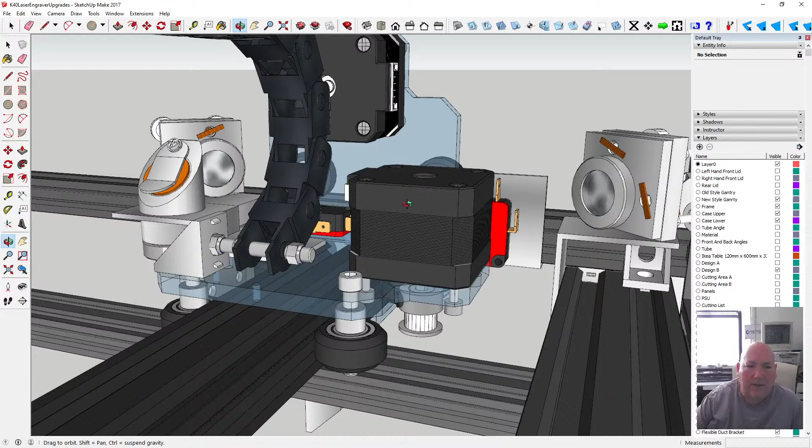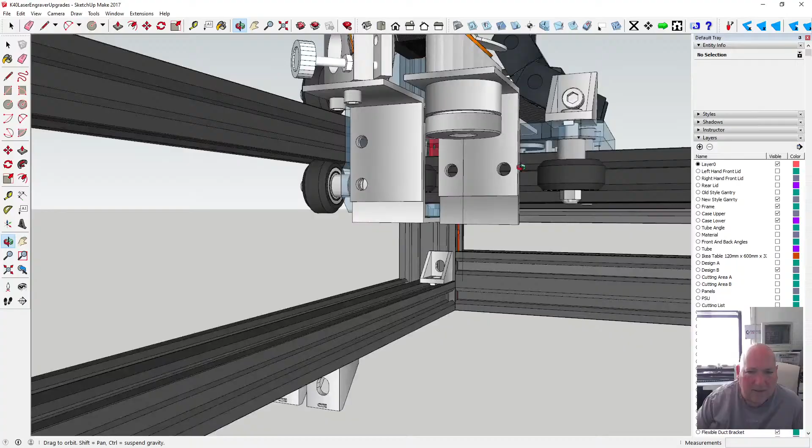Okay. Yeah, so this mirror is all pitted and hardly any reflection. This one's better. This one's not so good. Not so good, pitted as well, and the lens, can't tell, looks okay. Anyway, so there's all that.

So I need to... Oh, my elbow's hurting. Why is that?

Anyway, so what do we do first? Tell you what, let's model a bracket. That's easy, that'll get us into the flow again. I've got to model these door brackets I found. So I suppose we could model them. Yeah, let's model them, it's got to be done.

What does the thumbnail say? Let me just check the thumbnail. Have I even got the thumbnail on? Yeah, the weakest link, the mirrors. Yeah, we know the mirrors are the weakest link.

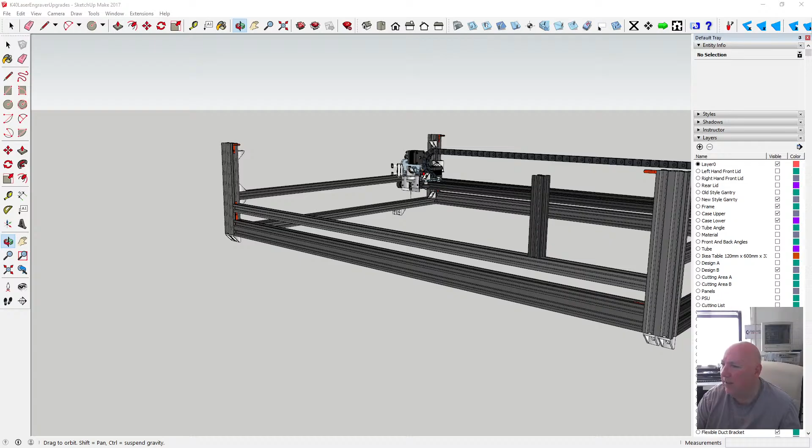I tell you what, before we do that, let's do some research. I'll just bring up ChatGPT, friendly neighbourhood ChatGPT. Right, here we go.

Laser, Chinese, K40. Have I spelt Chinese wrong? What's the matter with Chinese? Okay, K40, and we want to say to it: mirror 1, 2 and 3 - do they have any special properties? See what it's got to say about that.

Of course it's gonna... yes, mirrors 1, 2, 3 in a Chinese K40, CO2 laser machine have specific properties and requirements. Here's a breakdown of each and their special characteristics. Right, here we go, we're learning something now.

Overview of the K40 laser mirrors. The K40 laser uses 3 mirrors to guide the CO2 laser beam from the laser tube to the laser head, which contains the focusing lens. These mirrors are typically: mirror 1 mounted at the laser tube's output, mirror 2 positioned on the opposite side of the gantry, mirror 3 inside the laser head directing the beam down to the lens.

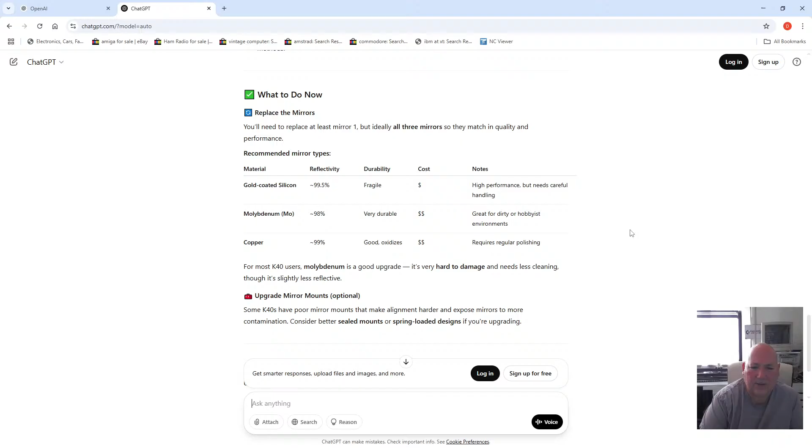For most K40 users, molybdenum is a good upgrade. It's very hard to damage and needs less cleaning, though it's slightly less reflective. Upgrading mirror mounts is optional - some K40s have poor mirror mounts that make alignment harder and expose mirrors to more contamination. Consider better sealed mounts or spring-loaded designs if you're upgrading. Until you replace them, you'll have to reduce the laser power.

You'll have reduced laser power, and alignment might be harder due to uneven reflection. You risk burning more material into the damaged mirrors, making future cleaning worse. Would you like help finding a good mirror set online or help with alignment?

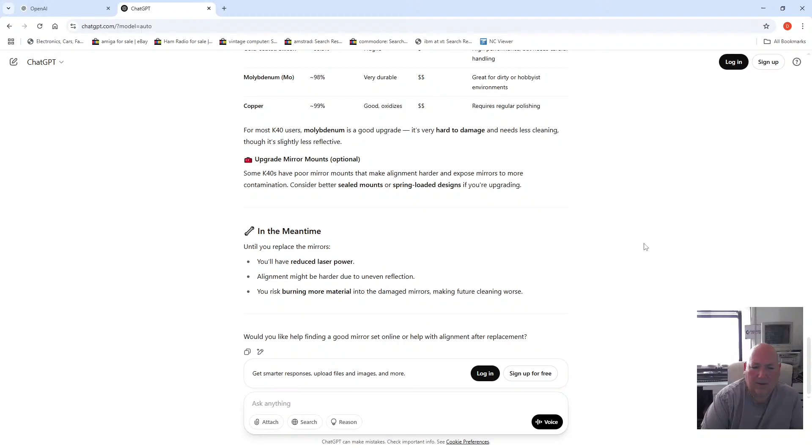Oh dear. Just got some lemon, it's a bit strong - I didn't dilute it.

I'm sorry to hear about the damage. Based on your script, it seems that the gold coating on the mirrors has been compromised, leading to reduced reflecting performance. To restore optimal function, replacing the damaged mirrors is essential.

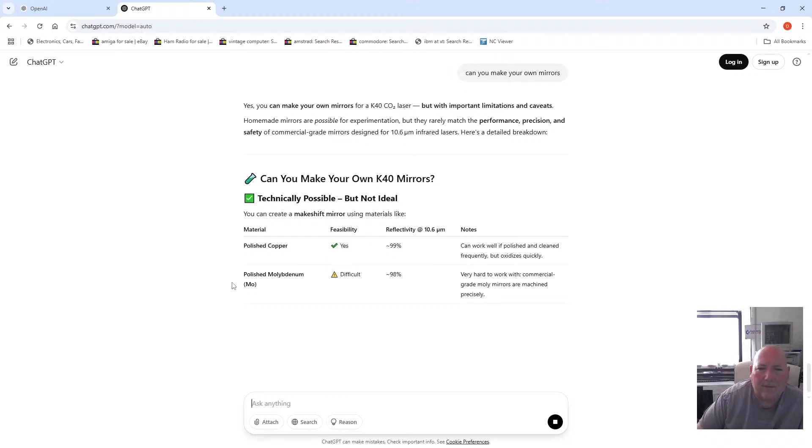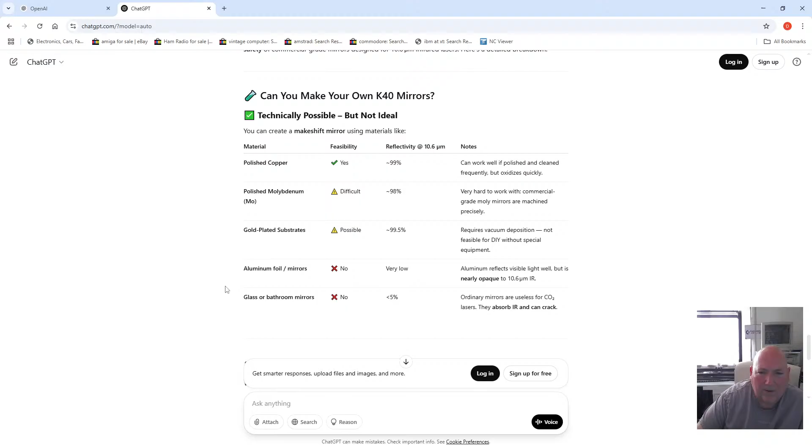Yes, you can make your own mirrors, but with important caveats. Homemade mirrors are possible for experimentation, but they rarely match the performance, precision and safety of commercial grade mirrors designed for 10.6 micrometer infrared lasers. Technically possible, but not ideal - you can create a makeshift mirror using materials like polished copper or polished molybdenum, which is difficult, or gold polished, gold plated substrates, which is possible. Polished copper can work well if polished and cleaned frequently, but it oxidizes quickly. A DIY polished copper mirror is the best way to go.

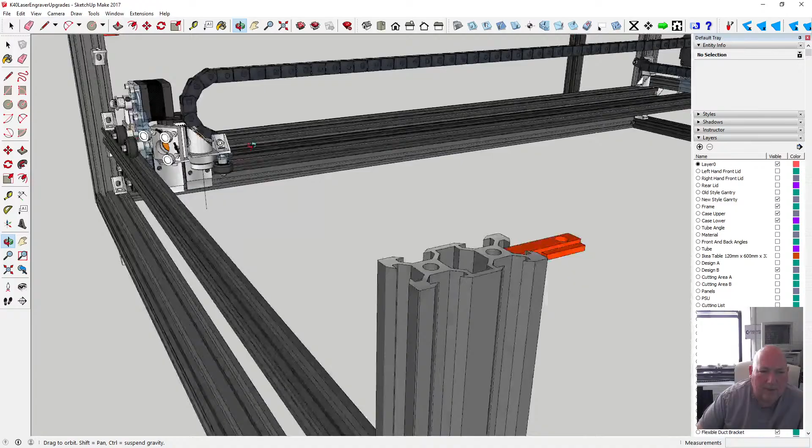Okay, alright. So we need to find some new mirrors by the looks of it. I've got a brand new set, but I don't really want to mess with the mirrors on a good working setup.

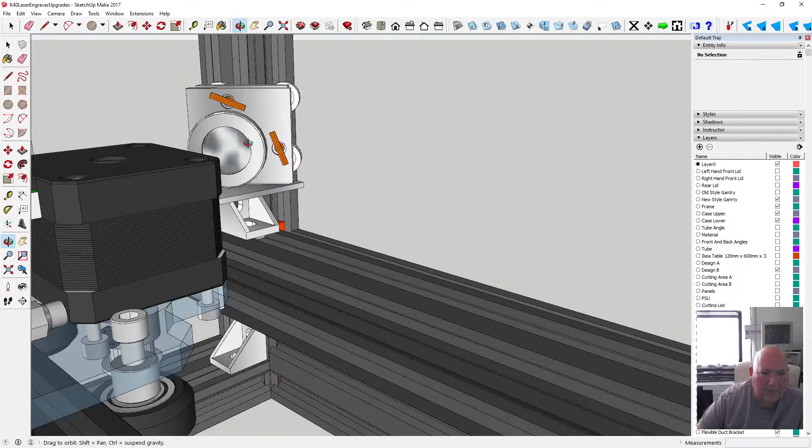I don't know whether the damage on mine was done before and all I did was wipe off the residue, or did I wipe the surface away? I've got to think that I wiped the surface away, but before I touched them, they were all matte and blemished, and this colour - in fact, that colour isn't the colour anymore. It shouldn't be that colour anymore, although it might be. Let's just change that.

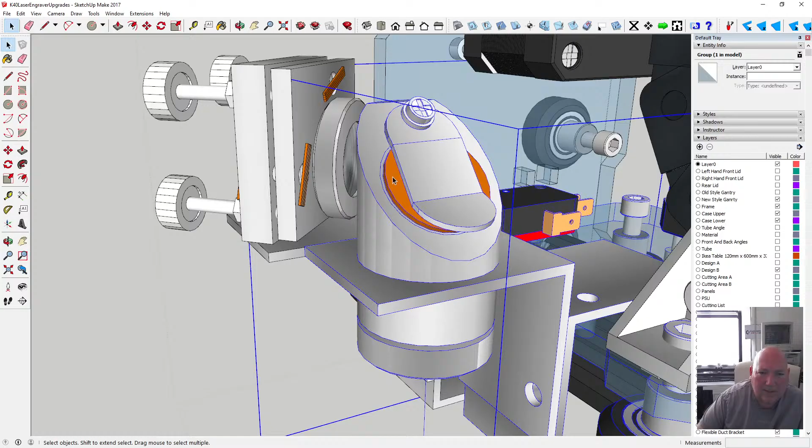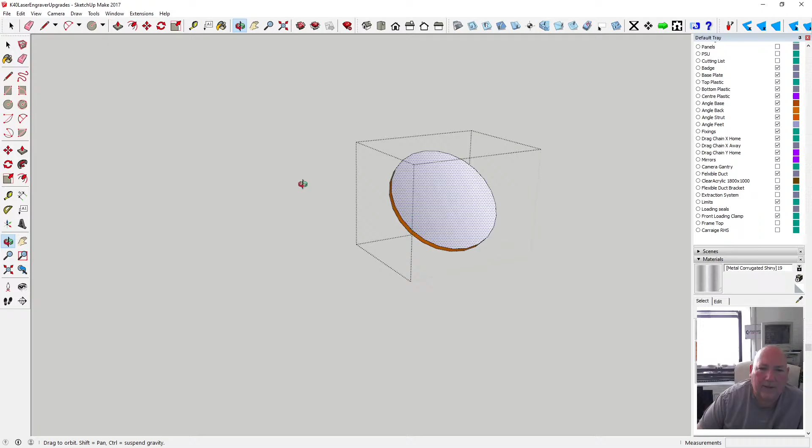Alright, let's change the colour. So that's going to be some kind of metallic. No, it's not that colour. Okay, so it's metal. Is that it? Probably. And then we've got the other side of it.

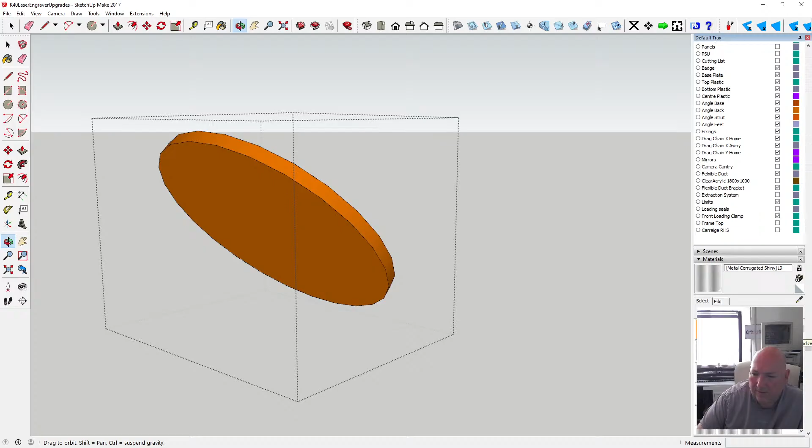Can't grab it. Now I can. Right, so we've got that side, and it needs to be a clear mirror, in the model. Is that okay? Probably.

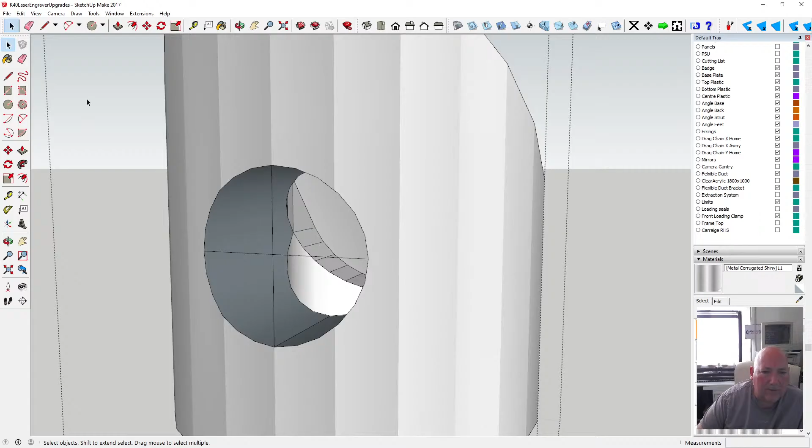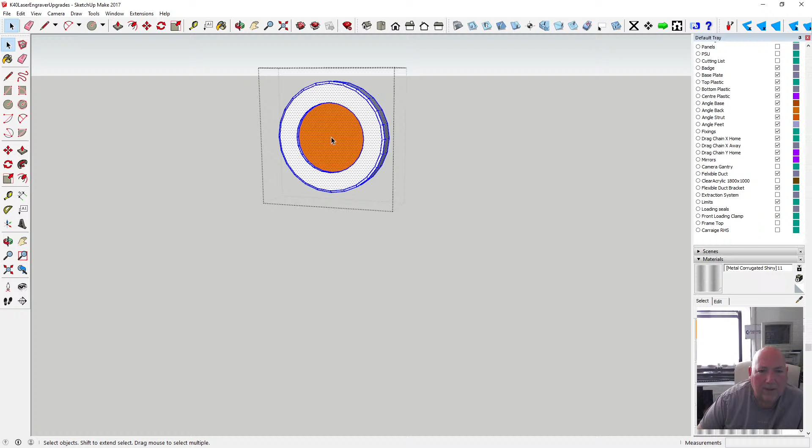We need to paint that one as well. Yeah, that's it. It's supposed to be a different colour maybe. Right, so why is that colour? Yeah, it's not supposed to be that colour. No, it's supposed to be silver. Okay, so it is.

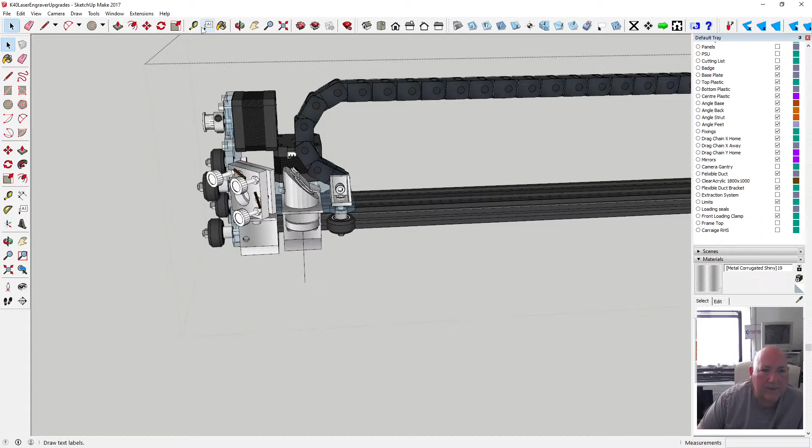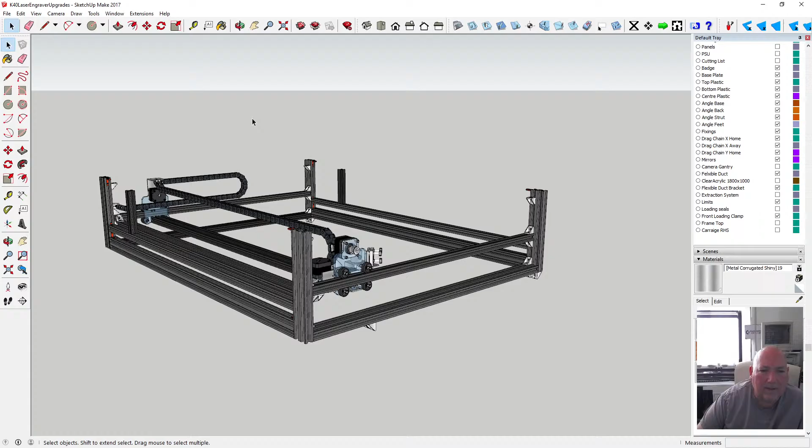Oh la la. Another one here, look at that. Okay. Alright. Okay, anyway, I've lost track of where I got to.

So yesterday I milled out, cut these, milled them out, and attached the switch, attached the mirrors.

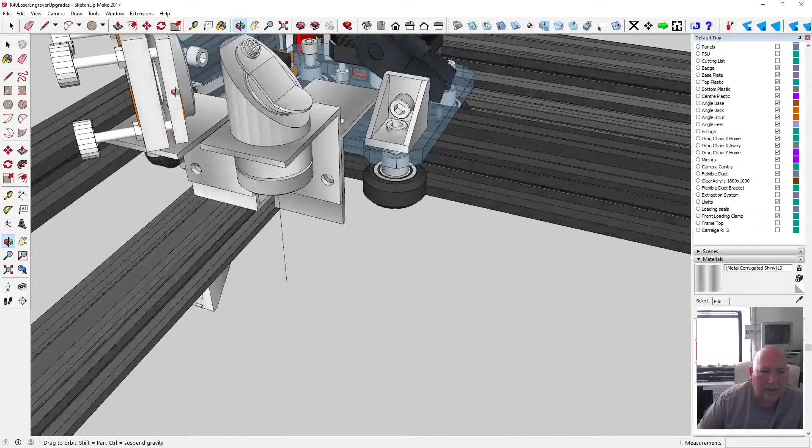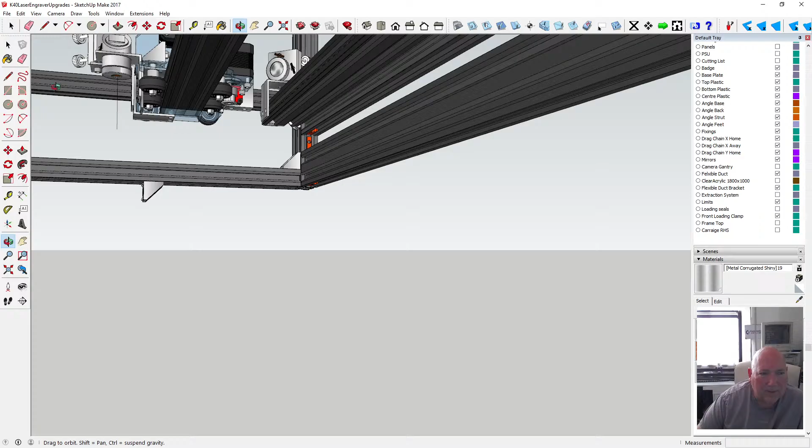Now this mirror is a bit, let's say, not flimsy, but it does move. And it's fastened underneath here. It's a little bit far. See how it's fastened to this right on the end, so it gives it a bit of this way. Not a lot. I don't know what will happen if it trundles along.

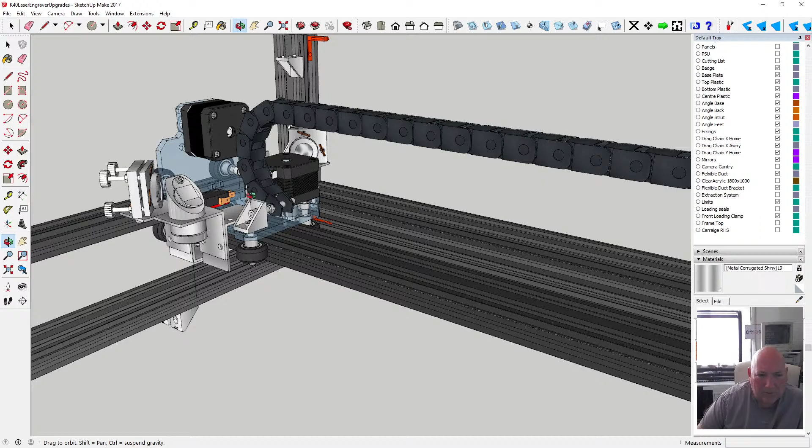And also the drag chain, when the links move, it sort of vibrates down. So each time a link changes position, there's like a joop, joop, joop, joop. So together with this oscillation and the chuk chuk chuk might be enough to make the mirror move.

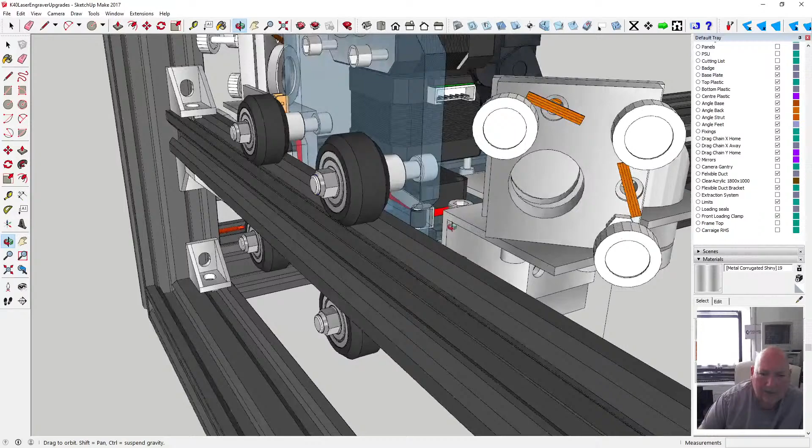Now we can probably do something about it, like fasten this bracket to this stud to give it some stability. I'm inside the model.

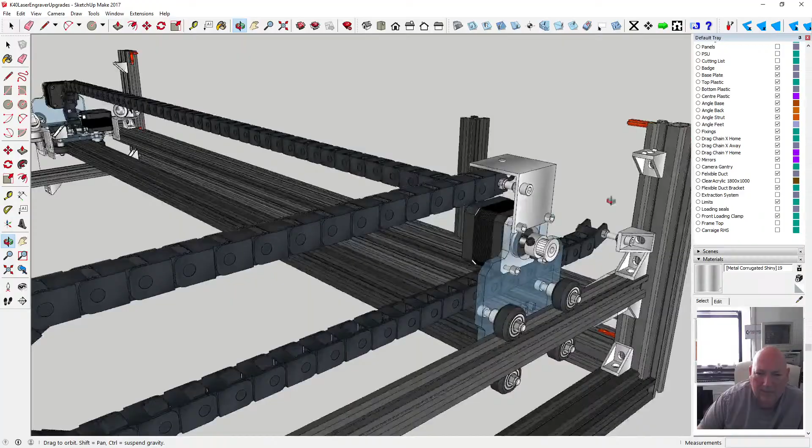Anyway, so right, so what I've got to do later on, yeah, I'm still trying to work out this. Is that right? Yeah, so that's what I've done there. And I've got to make this fit there. So I've got to go and carve that out.

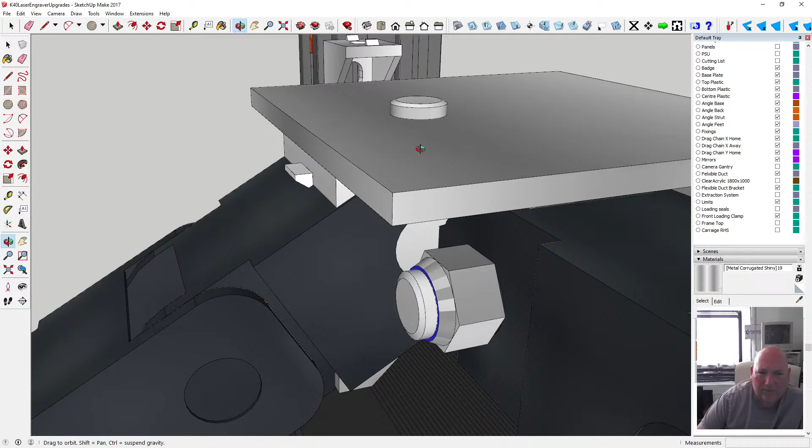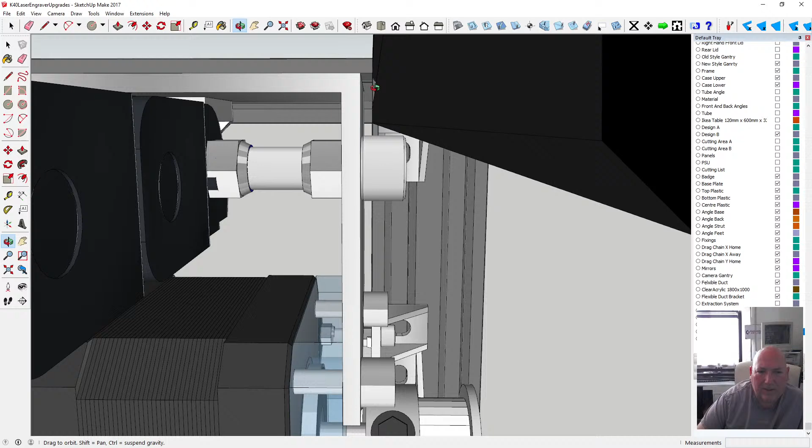And then I've milled this out to 5mm. And it needs a nut on it, or to be a 6mm fixing, because this is so close to the top frame top. As you can see, it's so close that the nut, I've had to use a different, no, I haven't been able to put that in.

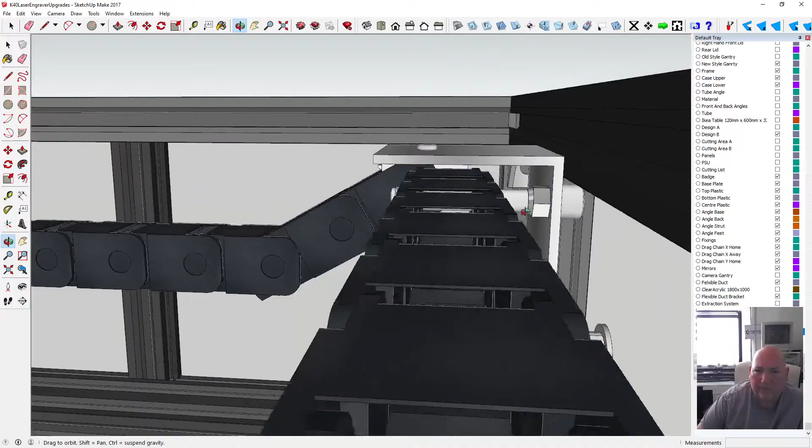Because in reality that is too close. So that's too close to that. So I don't know why it isn't, and I've lost control of it. Yeah, I don't know why it's, so that's just too close there. That fixing, even though it looks, when I put it in, it's sticking up because it's touching there.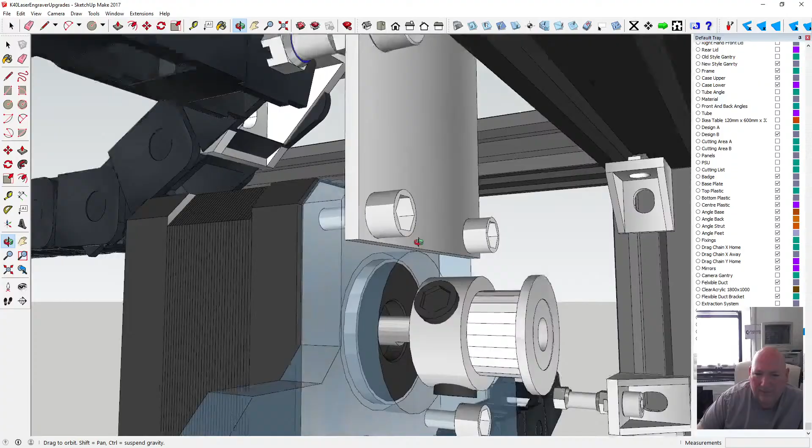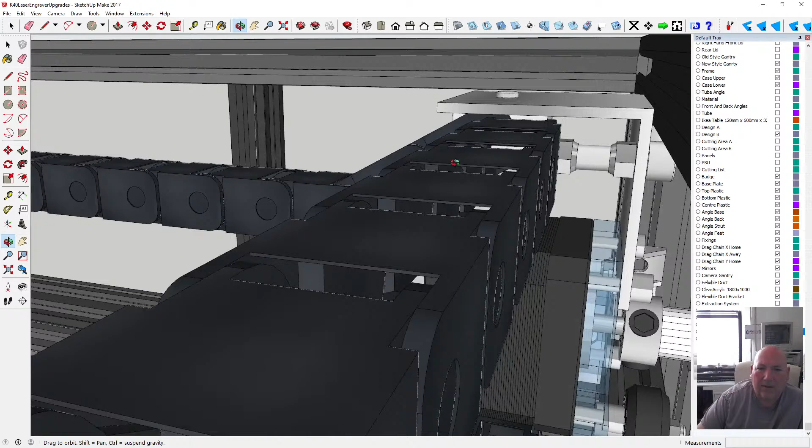So I've got a bit of space underneath, so it needs to be, probably needs to be smaller, this one. And I've put it in and it's flush with that, so it might need another set of holes here and then lower in a bit just to get that, or mill a new hole out, or elongate that hole and move it down. Don't like the idea of that, but I'm low of angle now. I've got no angle left, not that size. Anyway, so I've got to work out how to do it.

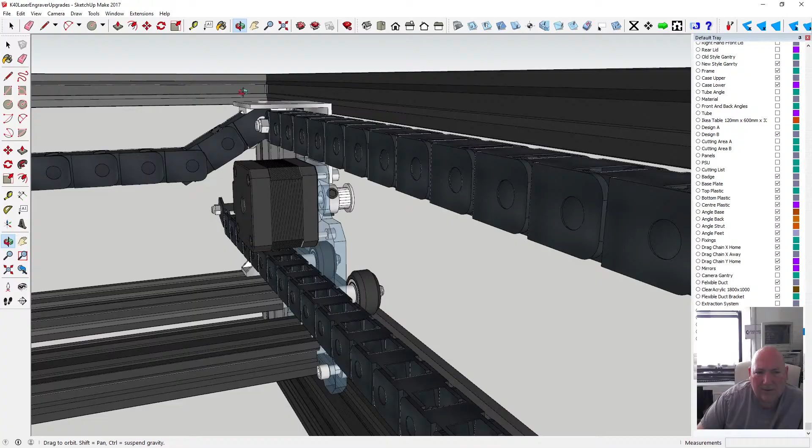So I should have put really, there's no room for a nut, if you know what I mean. There is no room for a nut, because the plastic will sit there and slide across the door, so it can't go any higher than that. Even that's too high there, it needs to be flush.

But I could make another one and lower it. So basically I could use the same bracket, take it off, and maybe lower it.

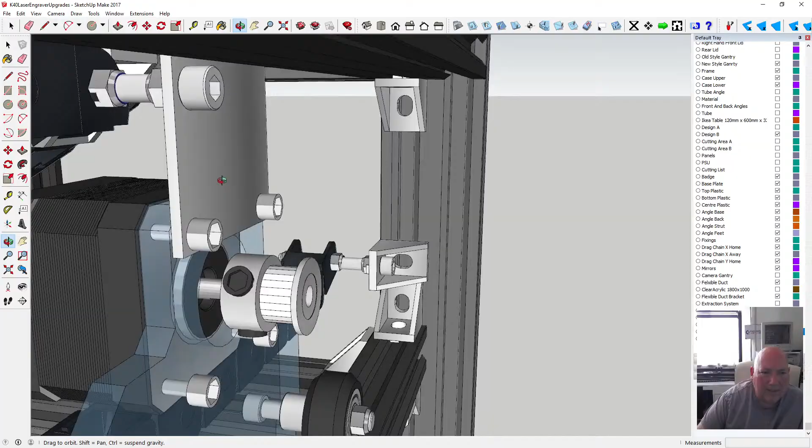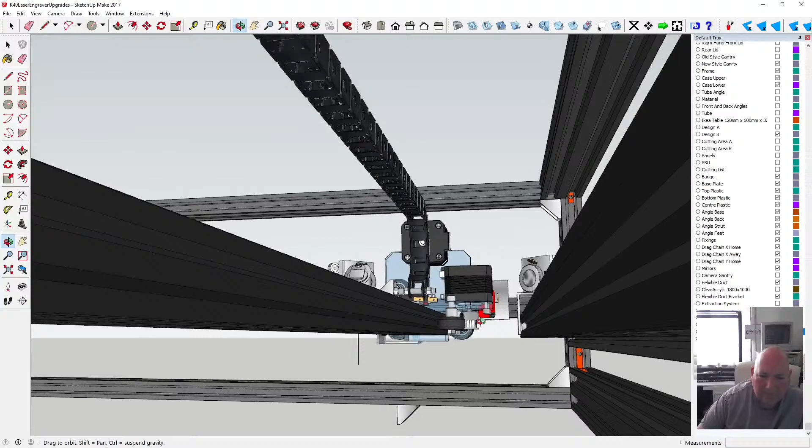Anyway, I've got all this to do. I've got to put the pulley wheels on and the belt. I've got the new things fitted. I've got these new plastics fitted, so I can put the belt in now if I wanted to, and run it round there. And I've got this, yeah, pushing against there, that's working. All that seemed to work.

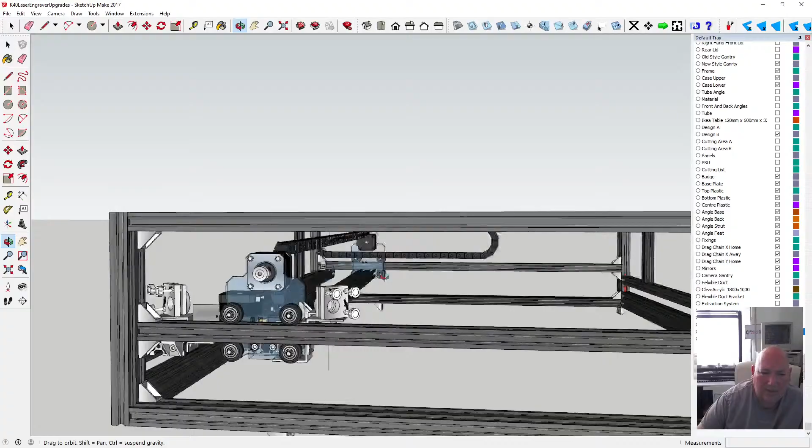I don't know whether I can show you this bright light. Probably not. So anyway, I'll have to come back to it.